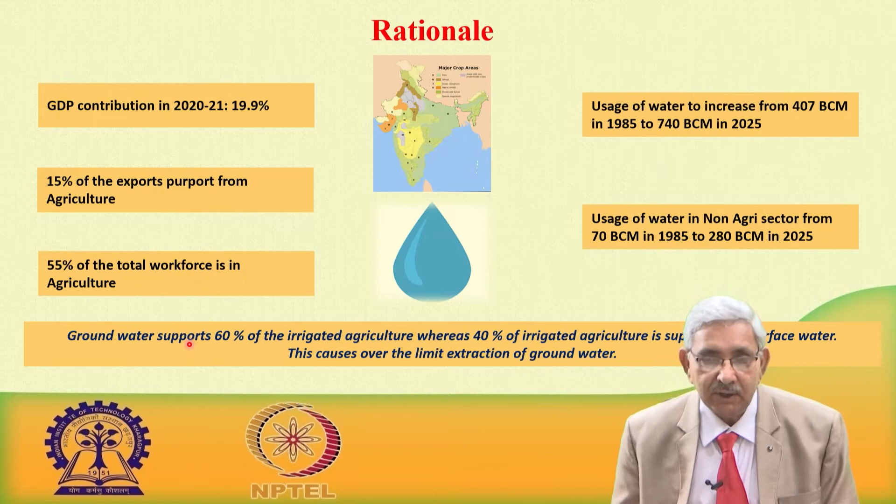Another point is that groundwater is being extracted more. It is the easily available source of water supply, and in irrigated agriculture groundwater supports 60% and 40% comes from surface water. Whereas huge funds have been spent by the Government of India, before and after independence, on developing surface water, reservoirs and canals, this water is only contributing 40%. If we continue to withdraw water, the water table will be declining, and availability of water for other sectors as well as the domestic sector, even drinking water, is going to be affected.

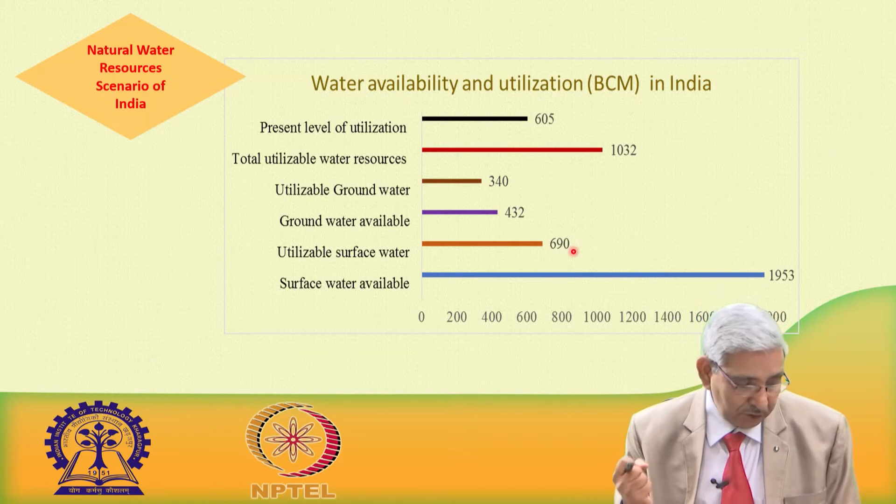And then this is the figure which I want to tell you, that the total utilizable water is 1032 billion cubic meter, which is the summation of the available surface water, 690, and 340 billion cubic meter of groundwater, which is 60%. So, this is also available resource; we are almost coming closer to the available water which is there for utilization. So, we need to use this particular water judiciously for agriculture purpose.

Now, another important part: when we talk of water being used for agriculture purpose, water use efficiency is very low. You can see here it is only 30 to 40% water use efficiency, means we can say 60 to 70% of water is going as wastage, and this is because we are using the canal irrigation system; a huge amount of water goes from the canal.

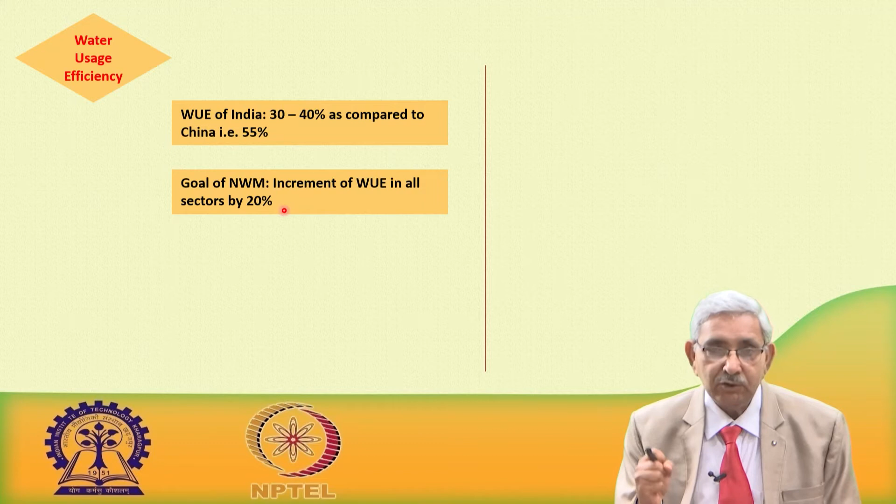I do not say that we should not use surface water or canal water, but we are required to see that the minimum loss of water takes place from the canal, and when it comes to the field, field to field irrigation takes place. So, proper water use management technology is to be adopted. Government of India has set up in the National Water Mission that the water use efficiency should be increased by 20% in all sectors. That is the important goal they have fixed.

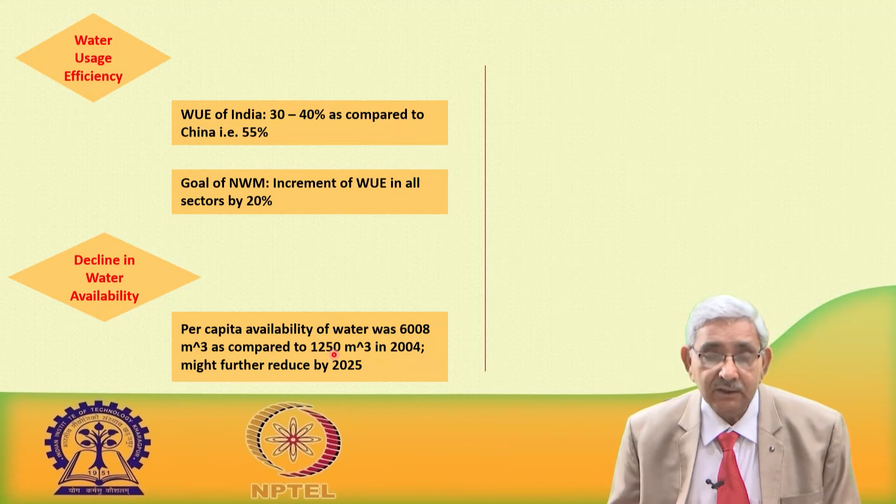Then the figure which I was just projecting, that there is a demand of water which will be increasing 4 times. Now, you can see here per capita availability of water is going to decrease. Initially it was 6008, it decreased to 1250 cubic meter in 2004, and it is likely to further decrease by 2025. So, this is another serious part. So, the present problem is all about management of water resources in an efficient manner.

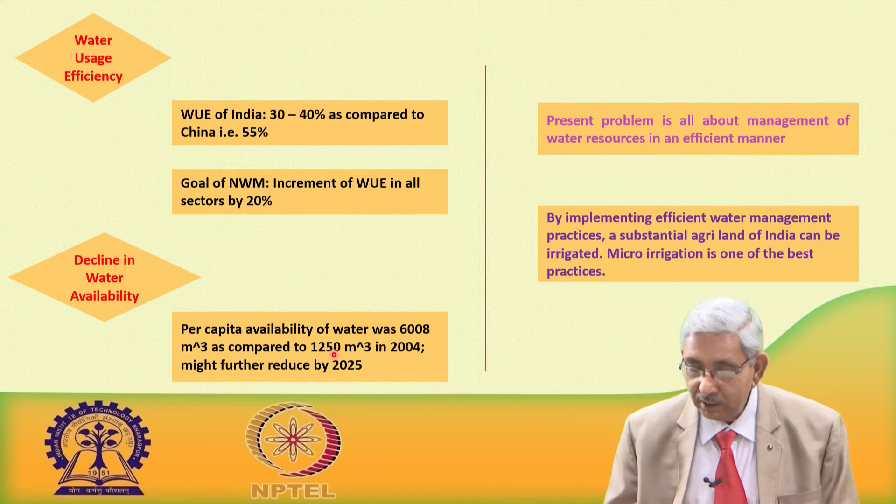So, we need to use efficient water management practices, so that substantial area can be brought under irrigation, and micro irrigation is one of the best water application methods which can play an important role. Now, these are the important components of micro irrigation system. Already in lecture 1 I have given you the benefits of micro irrigation system; I am refreshing you.

These are the components in the blue color boxes. When we are using micro irrigation system, there is improvement in the flexibility, improved tolerance of soil salinity. If saline soil is there, to a certain extent the crop can be grown. It reduces crop failure, increases crop yield and crop quality, maximizing the water use efficiency. In the previous slide I was telling you water use efficiency is 30 to 40%; here we can go very high.

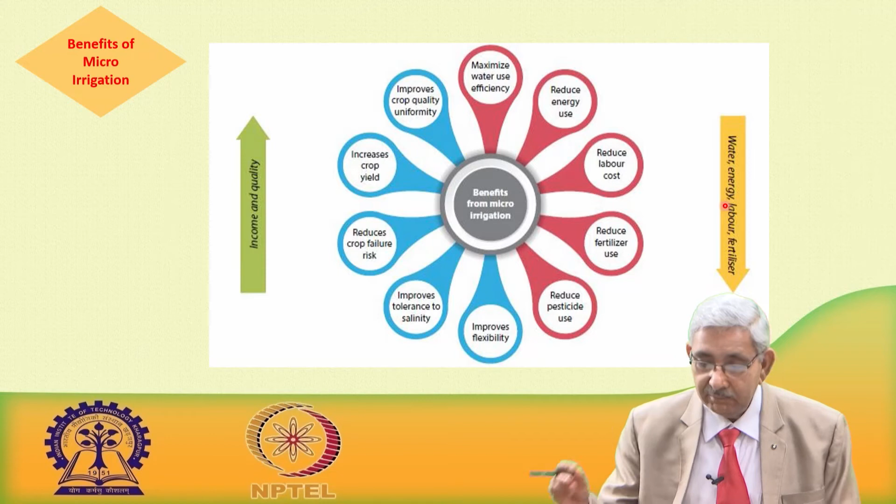So, now when we come to this part, if you look here, there is a reduction in energy, reduction in labor cost, reduction in fertilizer use, reduction in pesticide use. So, these are the other important components of how micro irrigation is useful.

Micro irrigation potential: agriculture is the maximum water consuming sector. I am repeating this sentence again and again to make you understand that agriculture takes a huge bulk of water for irrigation, and this should be utilized efficiently, so that we can save and bring more area under cultivation. So, when we are adopting micro irrigation system, farmers without much technical resources can get increased yield and bring additional area under cultivation.

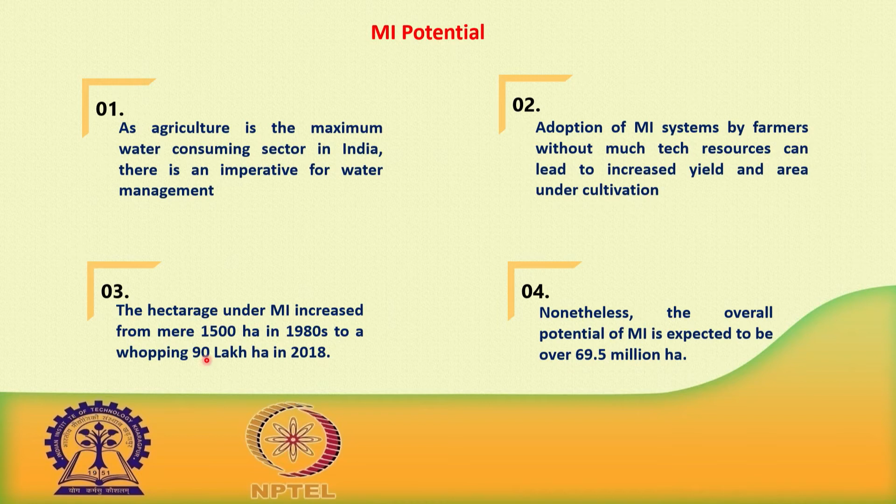After the farmers, huge government programs, agriculture universities, and technical institutions like IIT and central government funded institutions such as ICAR worked day and night carrying out research. Initially in 1980, it was only 1500 hectares, but due to continuous effort by the government and research institutions, it has brought 90 lakh hectares under micro irrigation system. But this is very meager compared to the potential of 69.5 million hectares. From 1980 to 2018, in 38 years, we have only brought this much area in. So it is a very slow pace; we need to give more awareness and activities among farmers so they can adopt these technologies.

Government of India has initiated a lot of programs to bring more area under irrigation. MI was introduced in our country in 1980, but it was at a research stage, with only a few farmers taken for demonstration in the field. But after recognizing the benefits of micro irrigation system, Government of India initiated subsidy schemes from the 8th plan onwards. A range of micro irrigation subsidy schemes were offered to small and marginal farmers for adoption of these technologies. Then in 2004, Government of India set up a task force committee which recommended more financial aid and liberalizing the scheme, making it more flexible to further strengthen MI adoption.

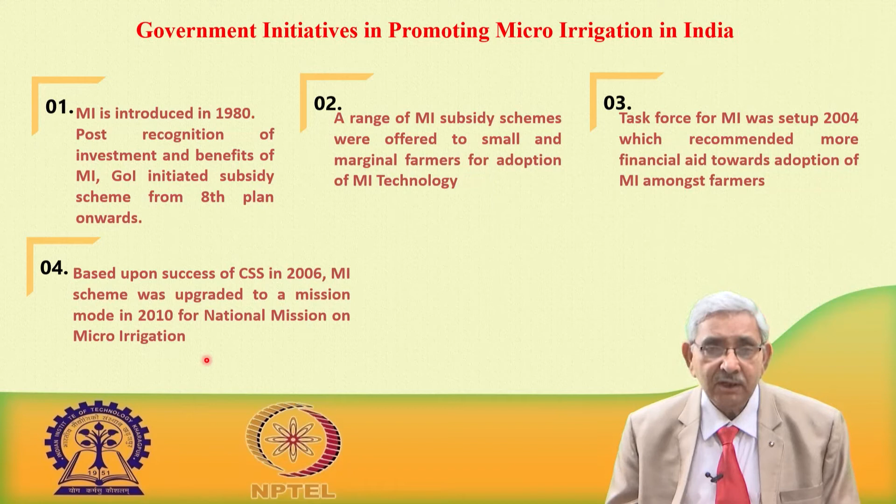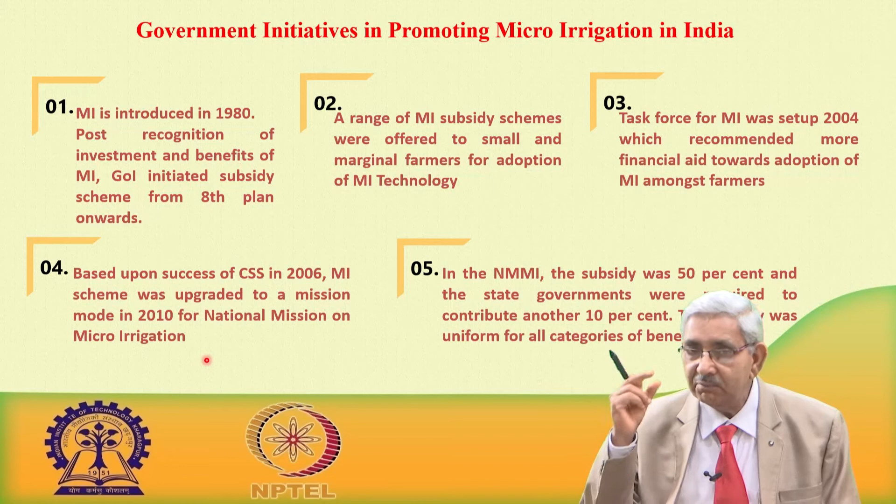Based on the success of the centrally sponsored scheme in 2006, the micro irrigation scheme was upgraded to a mission mode in 2010 by the National Mission on Micro Irrigation, NMMI. Under NMMI, 50% subsidy was given, with the state government required to contribute. Of this 50%, 40% was from the central government and 10% from the state government, and some states gave further subsidies to women farmers and scheduled caste, scheduled tribe farmers to the tune of 40% more. So 90% subsidy was available in some states. A lot of emphasis was given this way.

In 2014, NMMI was subsumed into the National Mission on Sustainable Agriculture, NMSA, with more focus on micro irrigation along with on-farm water management. NMSA later underwent further change with the introduction of Pradhan Mantri Krishi Sinchai Yojana, which focuses on water to every farm, har khet ko pani. This was the slogan of the Honorable Prime Minister, with a shift in focus to more crop per drop. This scheme was initiated in May 2015 and is continuing.

In the 2021-22 budget, 5,000 crore rupees fund has been allocated for micro irrigation, implemented by NABARD for promotion, with another 5,000 crores once this fund is exhausted. So a total of 10,000 crore rupees have been kept for promotion of the micro irrigation system.

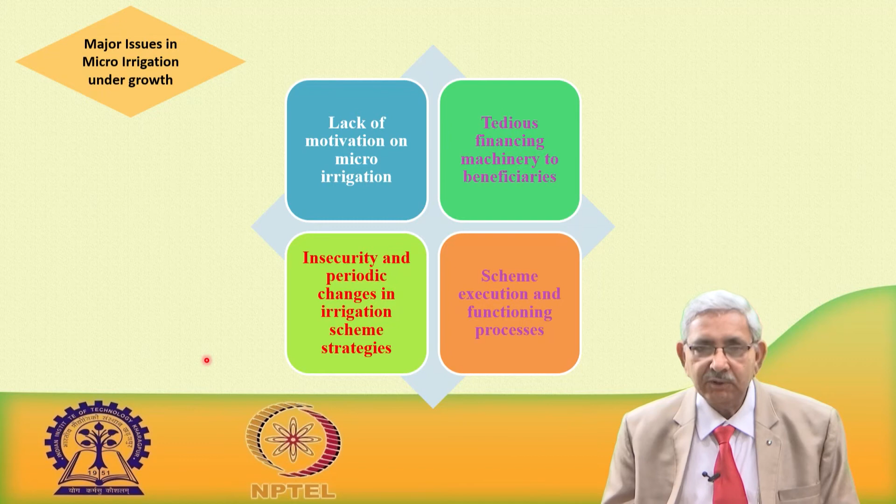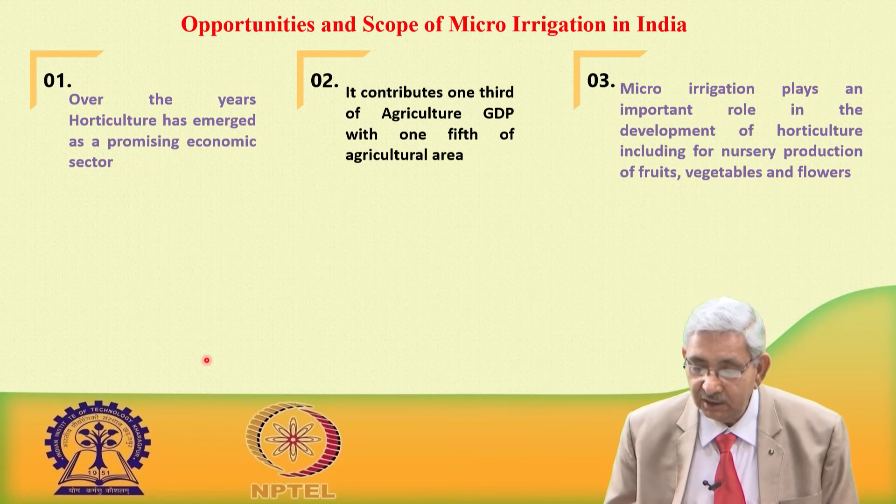Micro irrigation plays an important role in the development of horticulture. This growth has come because of the implementation of micro irrigation, and then some important things like the development of nursery, development of fruit crops, and then vegetable and flowers.

It has huge scope for bringing large areas which are falling under wasteland, so that can be brought under micro irrigation. With limited water, some crops which are lying idle can be grown, and this can be used for saline areas, degraded land, and difficult terrain. All these can be brought under micro irrigation.

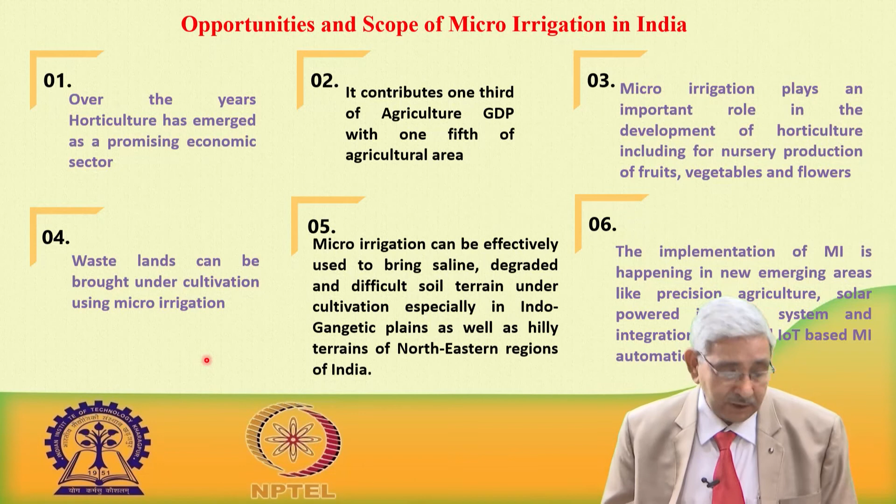The implementation of MI is happening in new emerging areas, mainly precision agriculture, where there is scope for all other disciplines besides agriculture engineering to come forward—in the implementation of solar powered irrigation systems, and integration of information and communication technology, IoT-based MI systems for automation of micro irrigation. So other disciplines of engineering can also play a very important role. There is good scope existing for micro irrigation systems.

Now let us come to the concluding part. Let us see what we have learned over the course of these things.

In view of the above stated facts, this course has been developed to educate and transfer knowledge to young budding engineers and other stakeholders of micro irrigation technology.

We have covered in this course a total of 11 modules. In module 1, we talk about fundamentals of fluid mechanics. Here we are not really giving a full course of fluid mechanics, only refreshing your knowledge of what has been taught in your basic fluid mechanics course, which is applied in the micro irrigation system. Only those things are being discussed.

These are the topics given in module 1: fluid properties, Bernoulli's principle (energy equation), continuity equation, Navier-Stokes equation, and then the basic fundamentals of soil water concept and water movement in the soil. All these things are discussed in module 1, fundamentals of fluid mechanics and soil water.

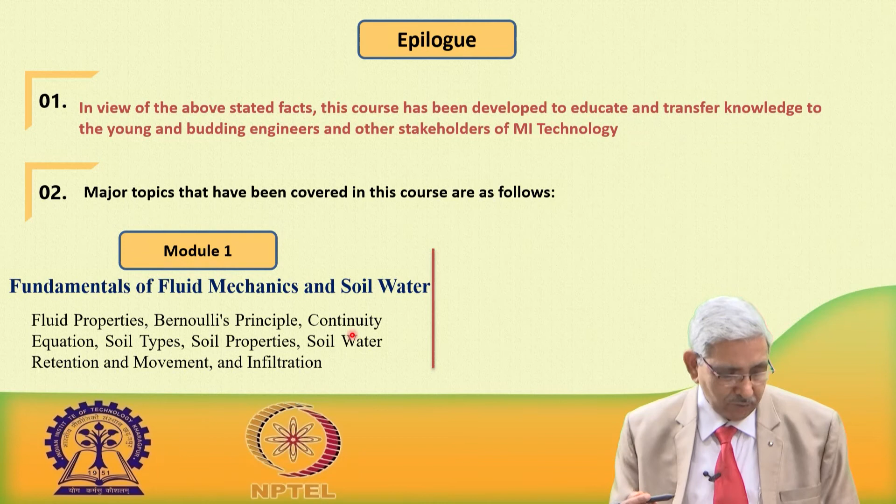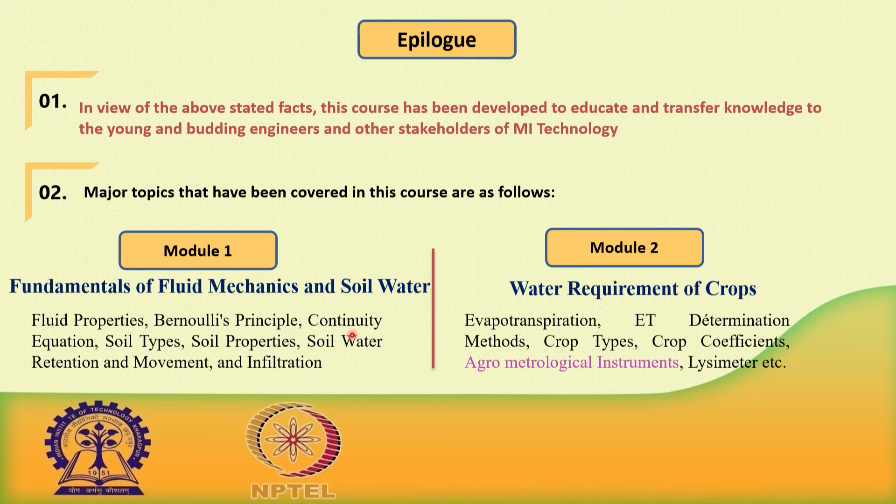Then water requirement of crops, where we have discussed evapotranspiration, determination methods of ET, crop types and finding their water requirement, and crop coefficient. Another important part is that you have been exposed to different types of agrometeorological instruments.

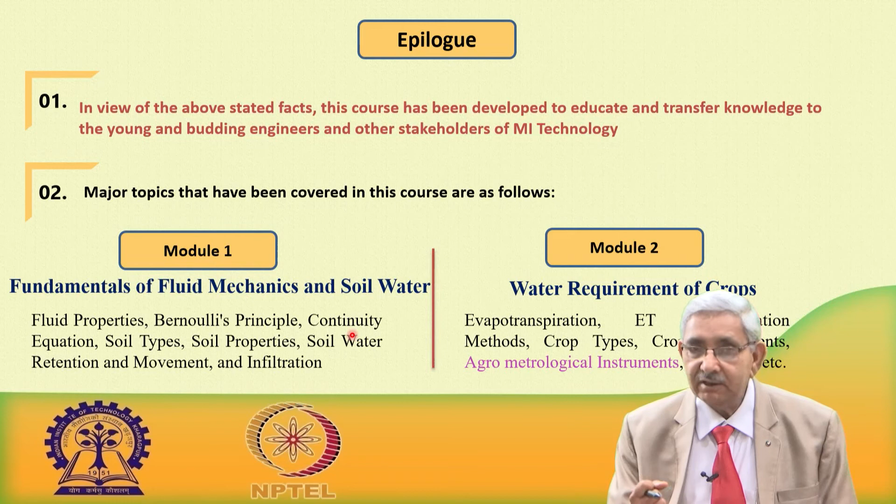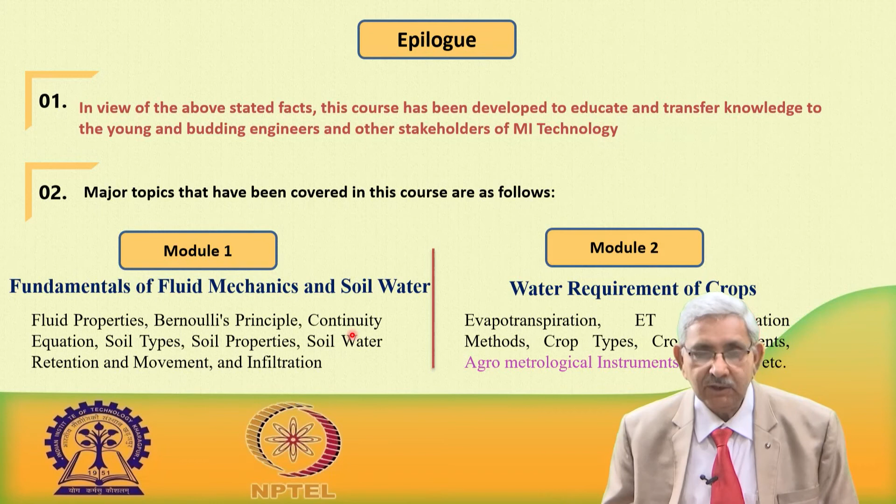We have instruments installed in the field, which has been given enough coverage. Lysimeter, the different types of lysimeter, how in the laboratory they determine the water requirement of the crop using the lysimeter—that has been covered and demonstrated to you.

We also discussed in module 3 about irrigation water management, irrigation scheduling, instruments for water monitoring in soil and plant, measurement of water. So all these things were discussed.

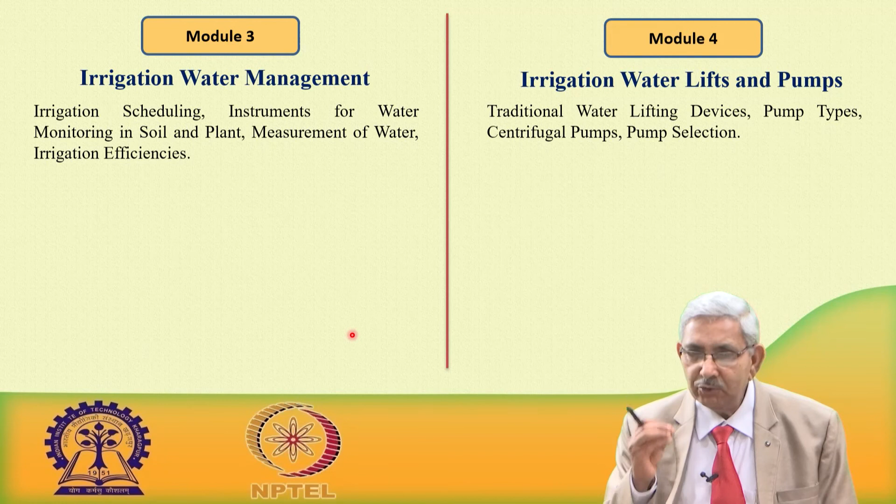Module 4 covers water lifting devices, and in all these lectures we have also been solving numerical problems to give you more exposure and confidence on these topics. So this we have discussed.

Now, if you see module 1 to module 4, these were the basic fundamental concepts, and these basic fundamental concepts are used in the micro irrigation system development.

The different types of micro irrigation systems were demonstrated in the field—we demonstrated the drippers, we demonstrated micro sprinklers, we demonstrated how to evaluate the micro irrigation drip emitter, and the soil water movement under drip emitters.

This is a research topic. This is not only simply about learning, but about how the water is moving.

Postgraduate students as well as PhD research students can take up research topics when fertilizer is added with water. Solute transport through the soil can be understood through this. So this is a good scope that exists.

Then there is fertigation system design, how to design it economically, including filters. Micro irrigation industries should come forward and take part in the design of drippers, and how to economically design the filters and the fertigation system. That is an important part.

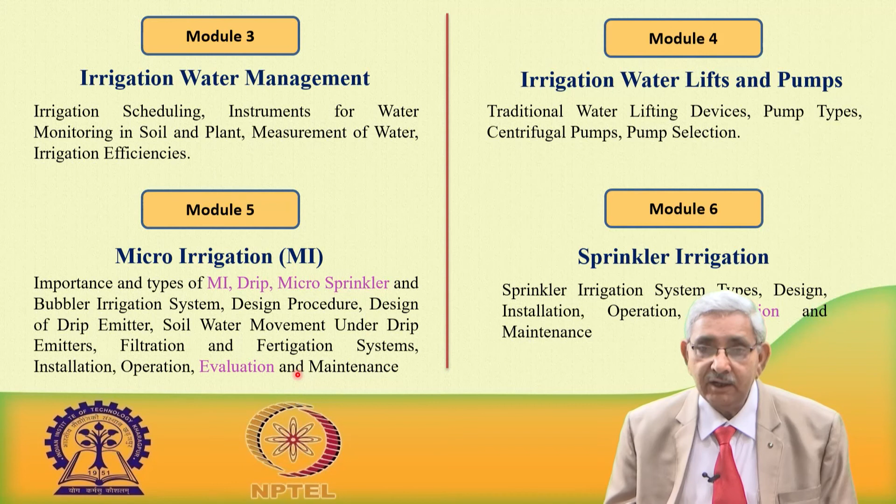Module 7 covers standards and quality assurance of sprinkler and drip irrigation systems, which is an important aspect of this course. Any material being manufactured should be passed through standards so that its life can be tested and it can operate for a longer period.

The solar PV operated micro irrigation system is dealt with in module 8. Large numbers of electronics and electrical engineers are needed to design the solar PV system economically, so that it can be used for irrigation. Integration of solar PV systems with micro irrigation systems has also been taught in this course.

Automation of micro irrigation systems is another important part, where electronics, electrical, and agriculture engineers should learn basic electronics and electrical engineering courses so they can become confident in operating and designing automated irrigation systems. That has been covered in module 9.

Module 10 is for the economic evaluation of micro irrigation systems, which is a very important component. Any system, unless economically viable, will not be accepted by society or by the stakeholders. So this is an important component, and different terminology related to it has been covered in module 10.

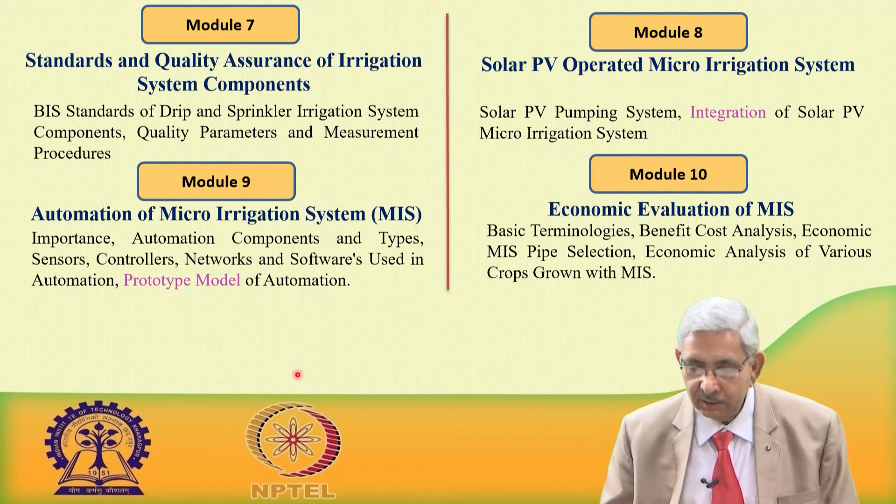Module 11 is precision agriculture, another important and interesting topic where micro irrigation systems are used along with other disciplines of engineering. Plant science and plant pathology persons are also needed for precision agriculture. This course covers this part as well, and we conclude with the epilogue of micro irrigation systems in module 11.